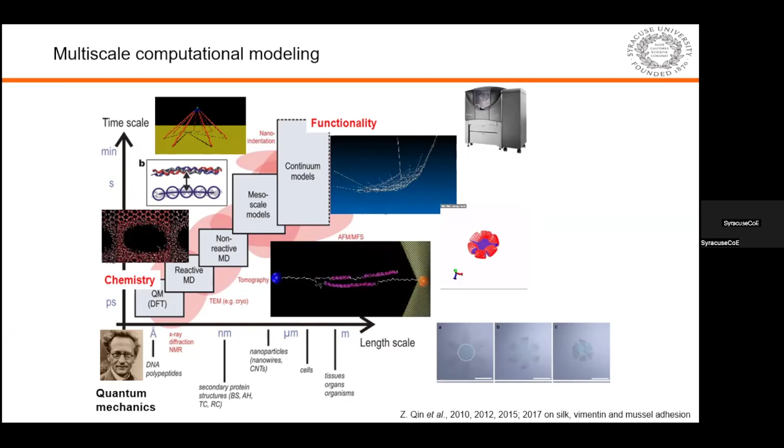For example, there are some simulation movies showing how these simulations can be applied at different scale levels to study the molecular mechanics, the large-scale behavior of spider webs, or design composites that are reactive to temperature. Here is the PNIPAM top coating; it's sensitive to temperature and can change shape once you change the temperature. These are just quick examples of our simulation methods.

The focus of our research is biomass, but biomass is a collection of many waste materials from different sources. It can be agricultural waste. It can be forestry, like cutting a tree or a wood board, so you have sawdust. These can be biomass. A huge amount of biomass is cellulose-based biomass that's composed of carbon.

If we want to use these to create useful materials with the best mechanical strength and the lightest weight, you can think of carbon fiber, carbon nanotubes, or graphene. Those are pure carbon atoms organized together to form strong network structures. You can also discuss how density changes Young's modulus and tensile strength, and design different architectures for different mechanical applications. That relates to my previous work on the scaling law of carbon-based architected materials.

Besides mechanical properties, we can also set up simulations to characterize thermal properties. We set one heat source and one heat sink, and study how those architected structures conduct heat from one end to the other. Once you create the 3D geometry from 2D graphene, you also introduce a lot of defects like 5-rings and 7-rings to the structure. Those defects scatter the phonons and make it difficult to conduct from one end to the other.

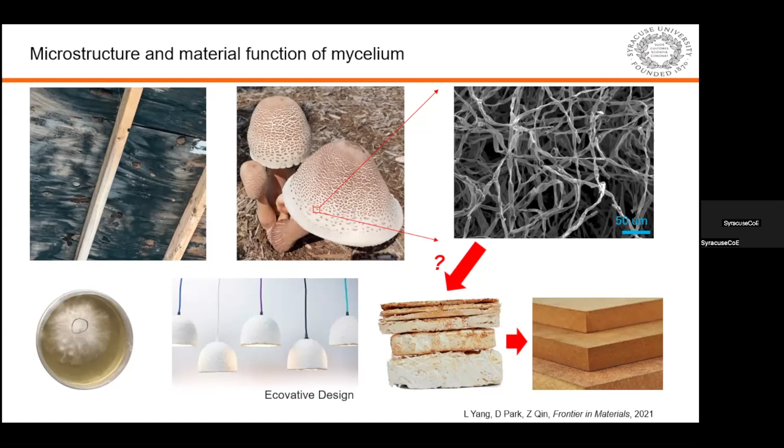And naturally, the mycelium is also very robust. Once you have black mold, which is related to mycelium, it will be very difficult to get rid of it. They can live for a long time. And they're also relatively easy to grow in the lab. We can prepare a petri dish and grow mycelium directly on top of the dish. So that's why we focus on this mycelium structure.

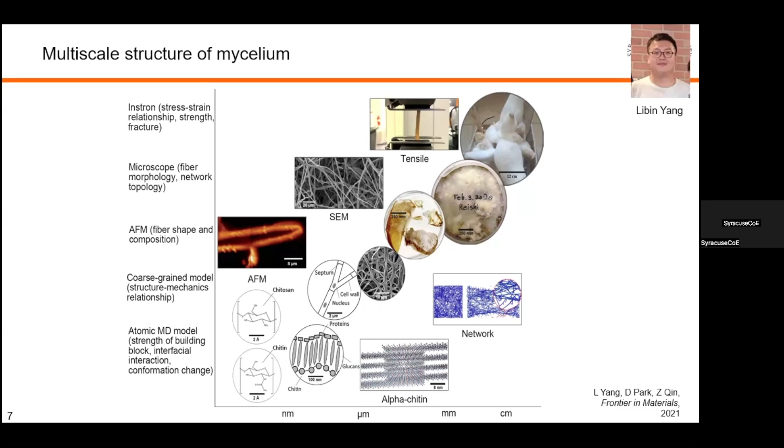One of my students, Libin Yang, my first PhD student, started to focus on this study. We first built a multi-scale picture of this mycelium. We ask, what's the material composition of the fiber? Once the fibers come together, what's the connectivity between them that defines the network? At larger scale, once you have a network, how fast can they grow? And once you take the mycelium from the petri dish and put it together with the biomass, how can they improve the property of these biocomposites?

It's also bio-safe. Once we increase the concentration of the agar, we effectively increase the stiffness of the substrate. And you see the growing speed also increases together with that stiffness. That's very interesting because we intentionally control the nutrient amount to be the same, but we just change the agar amount. So that suggests that the mycelium, while growing, can also sense the stiffness of the substrate. We have a paper in submission related to this topic.

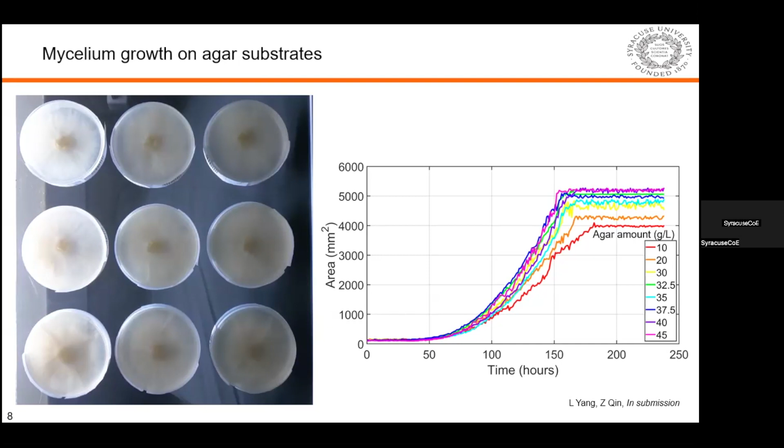After we grow the mycelium on the Petri dish, we put it together with wood fibers as the biomass. The wood fiber can be coconut fiber, stalk, or corn straw after harvesting. We use a blender to convert those wood fibers into small pieces and grow mycelium together. Here's the microscopic image. The thin fibers are mycelium, and the thick fibers are the wood fibers. The mycelium not only attaches to the surface of the wood fiber, but also forms entanglement with the wood fiber.

That's the way we believe the mycelium can bind wood fiber together, but also increase the stiffness and strength of the material. Libin sent this nice picture to MRS a few years ago, and he got this award. It's a very nice image of the mycelium structure.

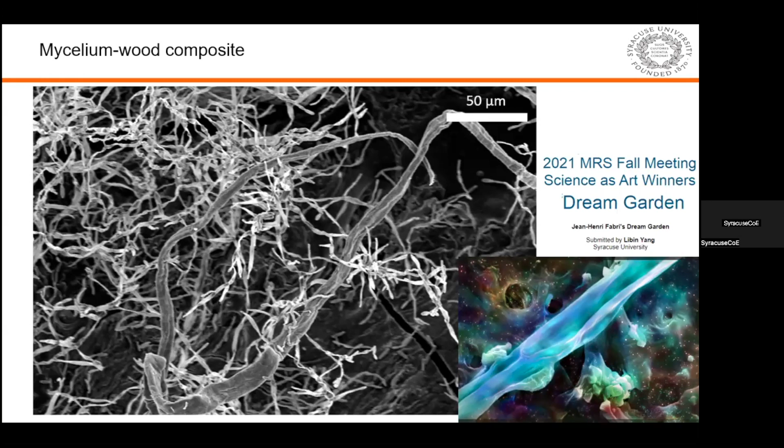But if you have a strong interface between those wood fibers, starting with exactly the same geometry, then during the loading test you see those interactions strongly contribute to the strength and energy dissipation. You have a lot of wood fibers you need to break before it ruptures.

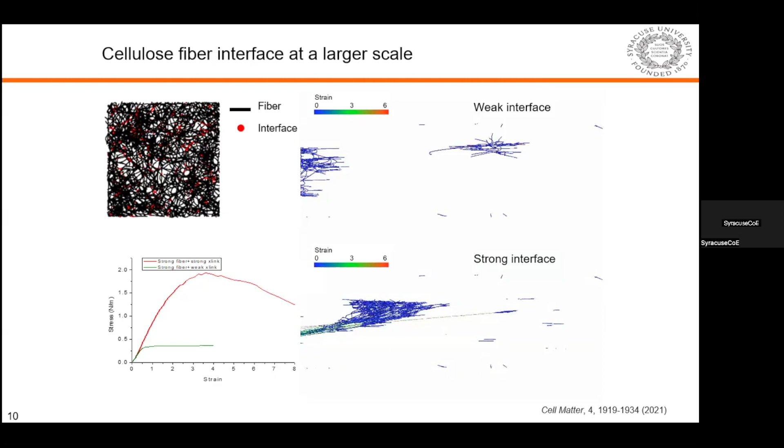So based on that, we move forward to the lab. We grow mycelium together with wood fibers, and then we culture the mycelium. After culturing, we turn that into dog bone samples, and we use a heat press to control the temperature and the pressure to press that into dog bone samples. And we do mechanical tests on each of those dog bone samples.

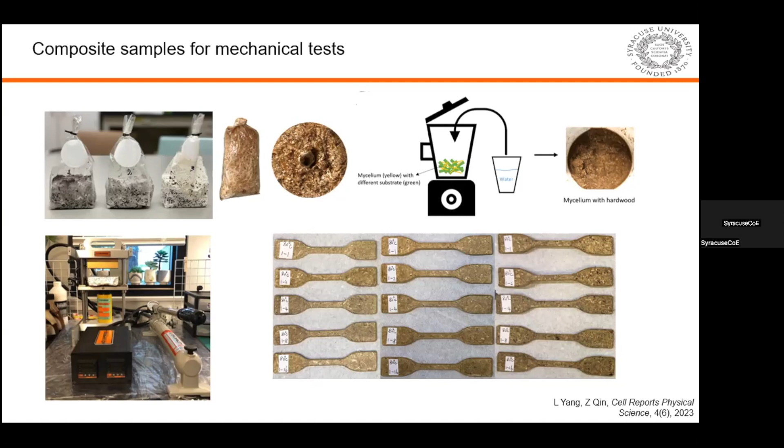And we analyze the results, and we build a machine learning model based on that to classify the strength, toughness, and the Young's modulus of these dog bone samples. And we correlate that mechanical performance to the treatment process. Like during the heat press, we have the temperature under control, the amount of time under control, baking time, and also the pressure under control, as well as the material, the substrate type.

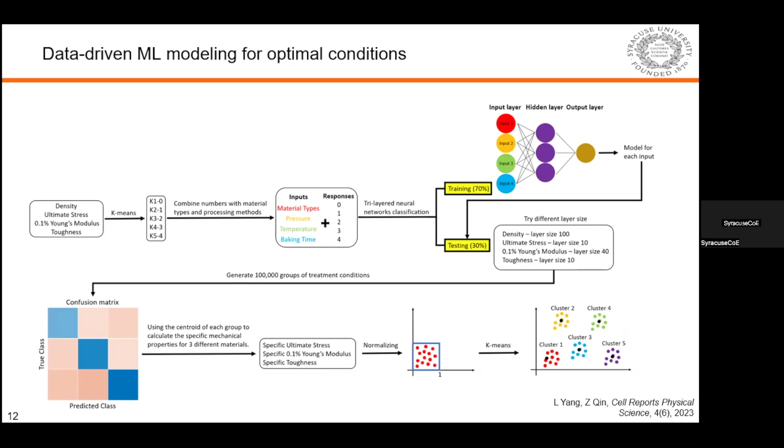So we correlate those processing conditions with the performance of mycelium, and then we build a machine learning model. So it's able to predict what can be the best combination of treatment parameters for strength, modulus, and toughness. That's the region highlighted in red. That's the cluster of results corresponding to the highest strength, modulus, and toughness. And then we can use the location of those regions to identify the optimal treatment condition for better mechanical performance.

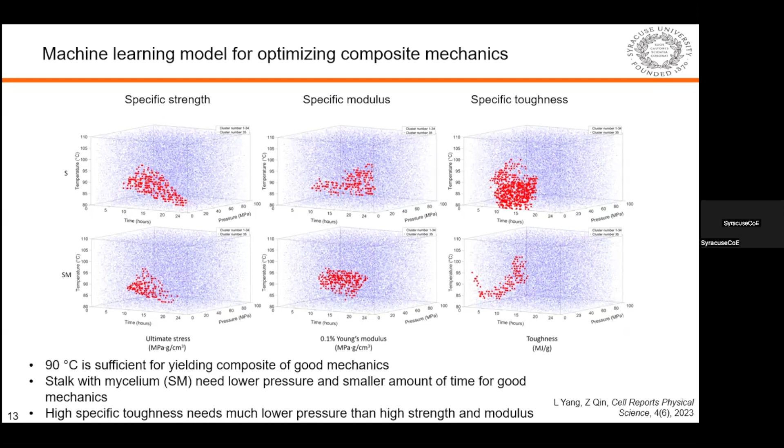And recently, we moved forward with this topic. Gargi in the lab is doing the mycelium, but she wants to study the property of the mycelium at the interface, including the thermal property. So we intentionally selected a metal surface because metal is very good in thermal conductivity. But mycelium, because of its low density and its porous feature, we expect it to have a low thermal conductivity. So we coat the metal with mycelium, and we put this substrate on top of boiling water, 100 degrees Celsius. Then we use the thermal camera so we can visualize the temperature distribution on the surface.

For the region coated by mycelium, because this mycelium is very thin, the thermal camera is actually recording the temperature still on the metal surface, not the mycelium. So you see the region coated with mycelium has a high temperature, but the region without mycelium is lower temperature. That means in the region exposed to air, the heat dissipates quickly and becomes a similar temperature to the air close to it. But in the region coated with mycelium, that heat cannot easily dissipate. That's why it's a higher temperature.

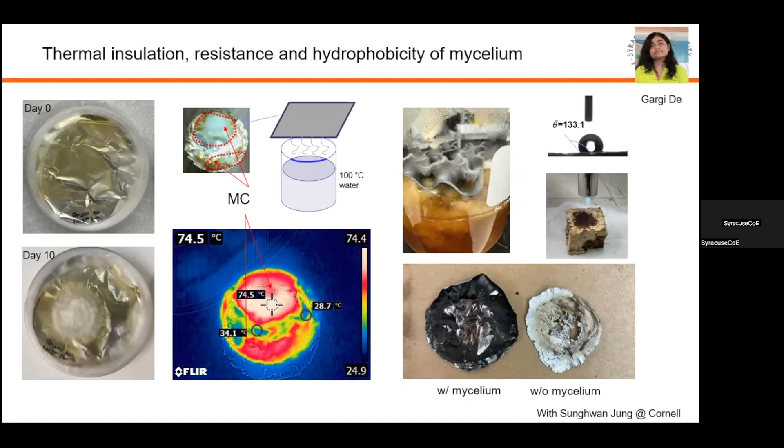And for the bulk mycelium composite, here we have an ongoing project with Professor Wilson, Bing, and Professor Zhang here at the Center of Excellence. We want to push the limit of this mycelium composite to apply to building envelopes, so we can benefit from the thermal insulation and the lightweight of mycelium. We are right now building a mechanical and material characterization lab downstairs, including a large green tent that can grow large mycelium blocks.

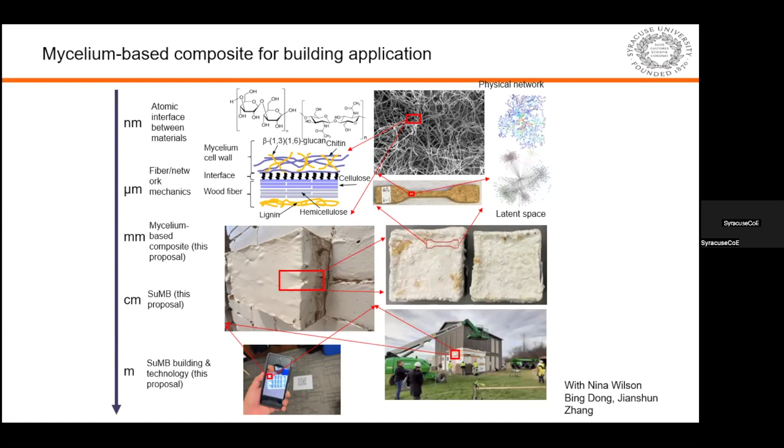Let's switch gears. Another application for biomass like wood: if you think about the Adirondack area, people there are sometimes off-grid, so they need to burn wood to get heat. But if you burn wood or cellulose indoors without good ventilation, it can turn into carbon monoxide. So my student Mingrui Jiang is asking how this carbon monoxide can get people into a toxic state, and once it's toxic, how to get rid of this carbon monoxide. Recently we got a paper published in JCTC, featured as a cover image.

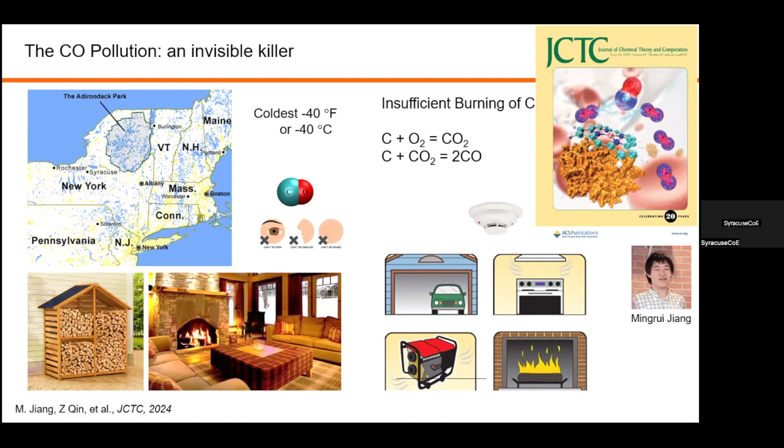So to answer that question, right now, once you get toxic by carbon monoxide, you need to go to a hospital, and the hospital needs to be equipped with a high pressure oxygen chamber, and then fill the chamber with pure oxygen, and then you can get rid of the toxic state. But if it's a low concentration of carbon monoxide, you just get a headache. If it's a higher concentration, you can lose your judgment. And if it's even higher, it leads to death in 3 minutes.

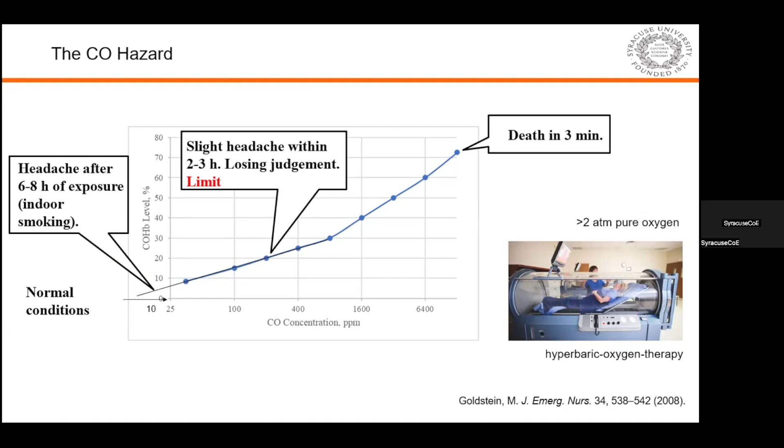So it's not only high concentration carbon monoxide that is dangerous; even cooking at home, if you do a lot of cooking, you can also get exposed to carbon monoxide at low concentration, like a toxic state. So that relates to the indoor environment and how this air will cause issues to humans. So we work to solve the problem.

We build an atomistic model of the hemoglobin, which is the key essential part in our red blood cells, and we study the binding of carbon monoxide and oxygen to this hemoglobin. Once we started to do that, we realized there's no good force field existing for this interaction.

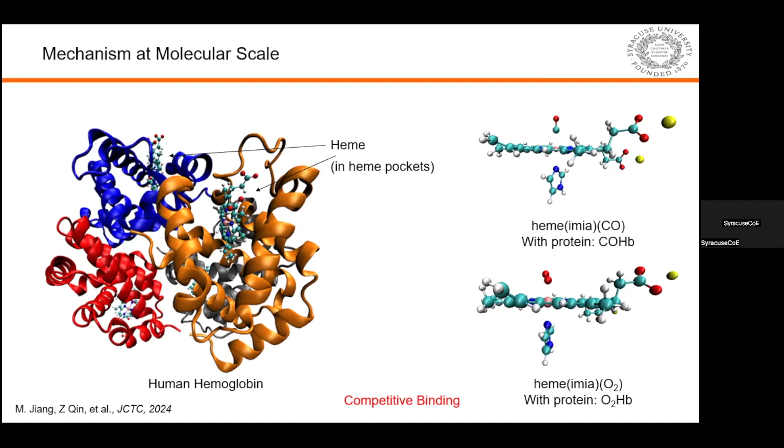In the hemoglobin, the key part to deliver oxygen is the iron. That's the key thing to form the metal coordinate bond with oxygen and then deliver the oxygen to different places. But once this position is replaced by carbon monoxide, oxygen will be difficult to bind. So that's why it causes the toxicity.

As I said, there's no good force field, so we build our own force field. We use DFT calculation, which is ab initio static calculation, and also CPMD, which is ab initio dynamics calculation. Using both results, we can characterize the bond length and the bond energy, and use that as the input to train a force field suitable for classical MD simulation.

The reason we want to do MD is because once we simulate the binding of carbon monoxide to hemoglobin, we also need to consider the water environment. But if we consider water, DFT will be very difficult for the calculation, too many atoms.

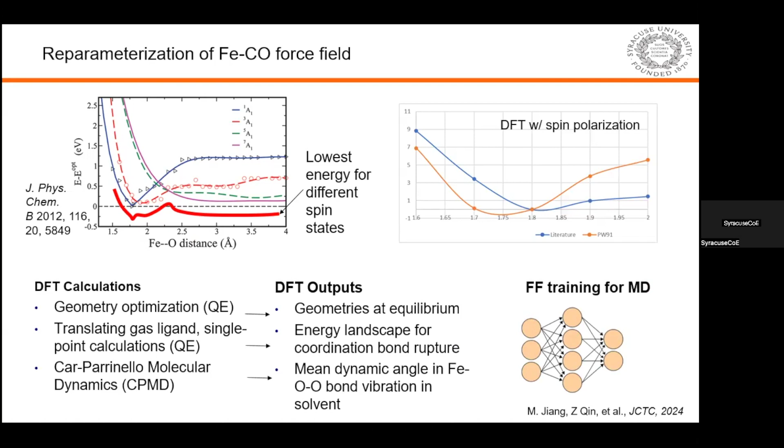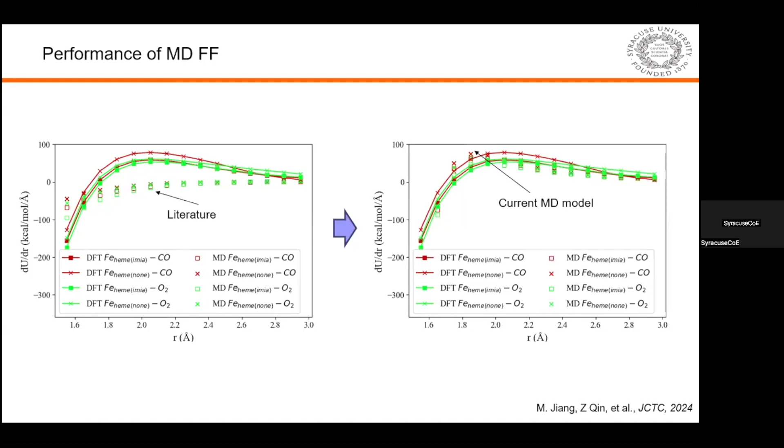So I just want to quickly show the performance of our force field. These curves are the ab initio calculation, and the existing force fields in the literature don't agree very well with the DFT calculation, but the force field we developed has a much better agreement.

Using that, we can simulate, for example, a carbon monoxide bound to the hemoglobin's Fe atom, the iron atom, and then use a spring to pull it off. During this simulation, we can measure the amount of force to pull this carbon monoxide from the binding state.

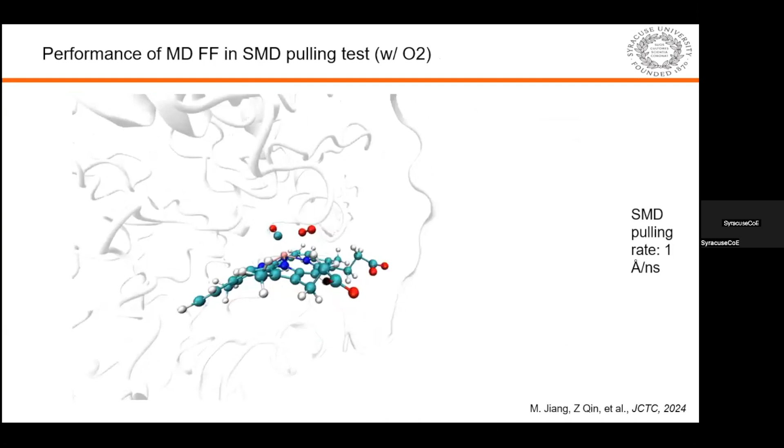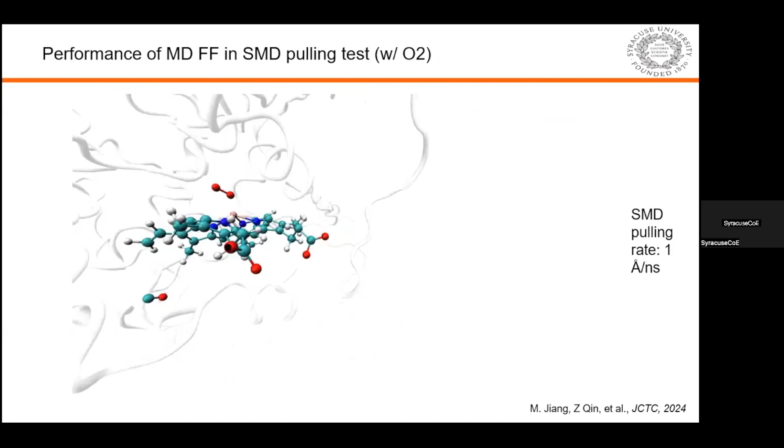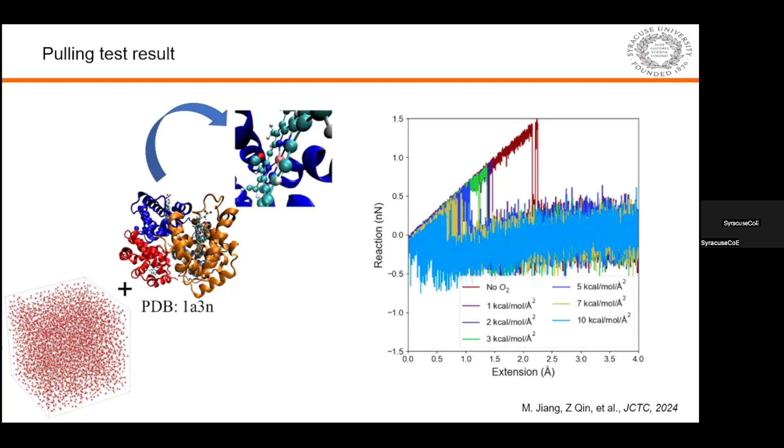In this simulation, we put an oxygen atom close to the binding site, repeat the simulation to pull carbon monoxide away, and measure how the oxygen biases the energy landscape for this attachment. We see that once we put it closer and closer to the binding site, the binding between hemoglobin and carbon monoxide becomes weaker and weaker. That's why the high pressure oxygen chamber can be effective to get rid of this toxic state.

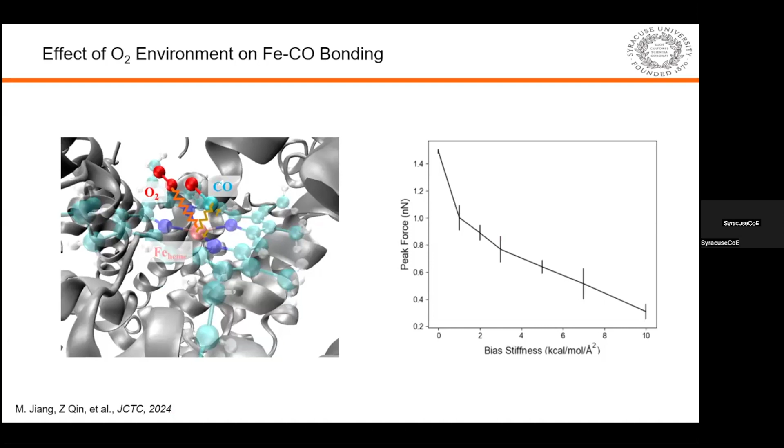We summarize the results, showing this bias stiffness that is proportional to the constraint between hemoglobin and the oxygen. Once that increases, you force the oxygen closer to the binding site, and the peak force to get rid of the carbon monoxide becomes smaller and smaller. So we are very happy about the preliminary results.

Based on that, we want to study whether there's any small molecule that can help facilitate kicking off this carbon monoxide. Is there any way we don't need to use an oxygen chamber, but other molecules? So we are referring to other medicines people use to treat hemoglobin.

For example, there is a disease called sickle cell disease. Once it happens, your red blood cells turn into the shape of a moon instead of a circular, rounded shape. The molecular reason is a point mutation in the hemoglobin. Once that happens, the hemoglobin assembles into a shape like microtubules. Once they cluster together, their surface area significantly decreases, so they lose the effect of delivering oxygen.

People have done a lot of study on this disease, and they found some molecules like 5-HMF, small organic compounds that can be effective to get rid of the sickle cell state. So we are testing those compounds to see if they're also useful to treat carbon monoxide toxicity. Based on our simulation model, we can study the mechanism of this disease, and maybe later use these small drugs and the force field we developed to treat carbon monoxide toxicity.

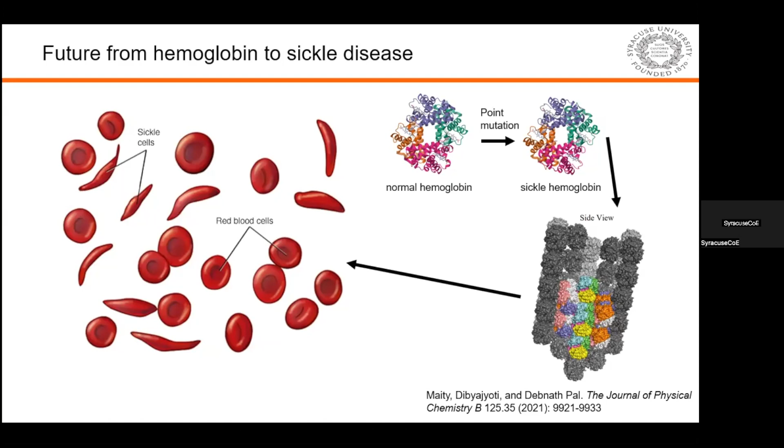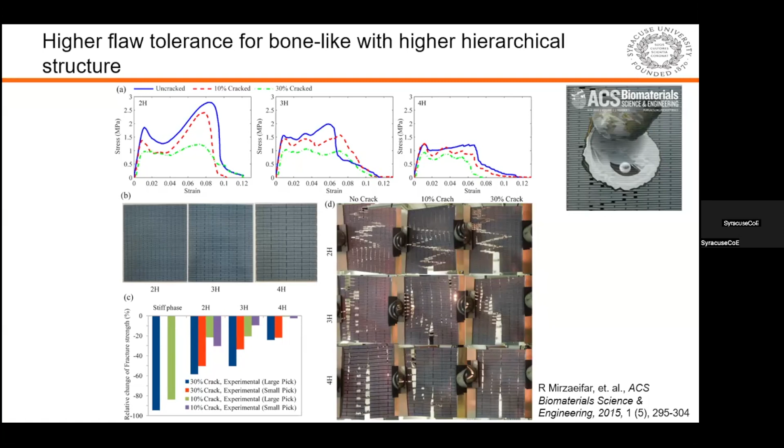So we've done 3D printing, combining rigid material and soft material to design an architecture that mimics the nanostructure of nacre. And we found both the geometry and this heterogeneous material combination are crucial to the toughness of those nacre-inspired structures. That's why, when we think about how to convert those biocomposites into stronger materials, we can refer to those lessons from nature.

Because the aim of the research is high toughness, it not only relates to composite material development but can also relate to large-scale engineering applications. For the composite, you can always have a structural defect or crack, or sometimes you need circular holes for functional applications. But if the material has those defects and cracks, based on our basic mechanics of materials class, there will be stress concentration. And the failure of the material always starts from the highest stress concentration point.

How do we improve the design of these composites and make them less sensitive to those defects and cracks? That's the question for composite design. But for engineering design, like tunneling, once you create a tunnel you cannot just drill a hole there. You need to figure out a way to reinforce the tunnel to prevent it from collapsing. People have done related studies showing you also need some heterogeneous material distribution to reinforce the top of the tunnel to make it less likely to collapse.

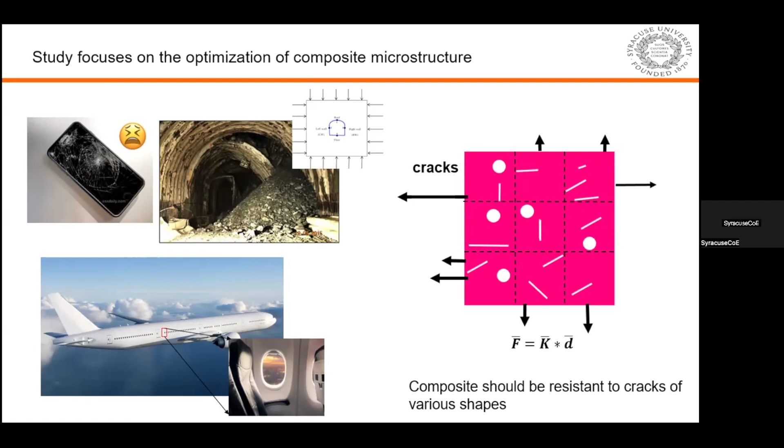Another application: if you have a tough material, you can apply it to phone designs to make them difficult to fracture or smash on impact. So we switched gears to study the crack and failure of materials. This is a quick example showing how nanomaterials fail. The reason I picked it is that for nanomaterials you have very clear visualization of how, atom by atom, the crack can propagate. If you check the front of the crack, those low-dimensional materials might give you the highest resolution, since you can see the behavior of every single atom around the crack tip.

So these three typical two-dimensional materials are widely used in semiconductors: graphene, MoS2, and MXene. Current semiconductors still rely heavily on silicon, but for future development of semiconductors, people have repeatedly proposed using low-dimensional materials. Graphene is a single layer of atoms. MoS2, molybdenum disulfide, is three layers of atoms. And MXene is five layers of atoms. They're all called two-dimensional materials because most of the atoms lie in the plane. Okay.

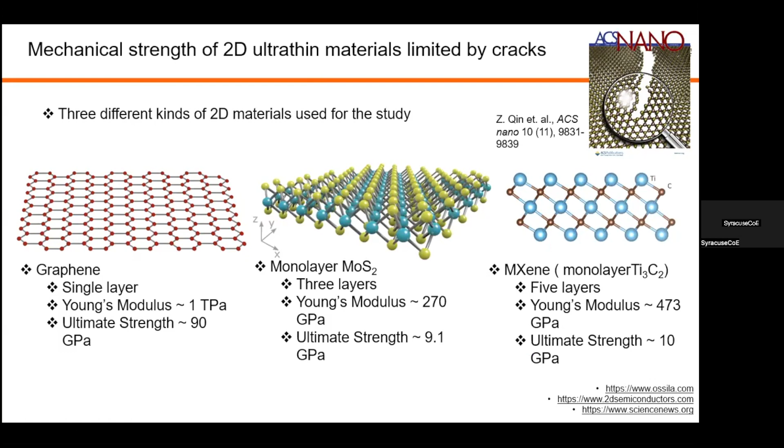This work was done by my student Camilando Paul. He took all those different two-dimensional materials and ran molecular dynamics simulations to study how they fracture. If you don't do anything and just take the pristine material, you see that under loading there will be a strong stress concentration at the crack tip, and once it starts to propagate, it will propagate through the entire material. MXene is more plastic and flexible, so it fails later than the other two materials, which are more brittle.

But a way to enhance the toughness of this material, to make it less affected by the pre-existing crack, is to borrow the concept from nature and create some nano-architectures. So we simply created bridge structures, turning a continuous 2D material into isolated bridge structures. We think if it's continuous there will be high stress concentration, but if it becomes a bridge structure, the stress gets more distributed.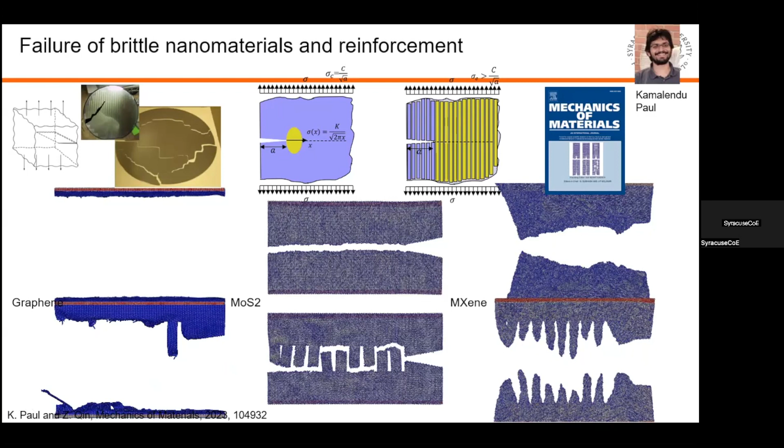So the architecture is important. I also want to say that how to make the flexible material phase, like flexible means low Young's modulus, but also high strength. So that's also a key to improve the strength of the composite.

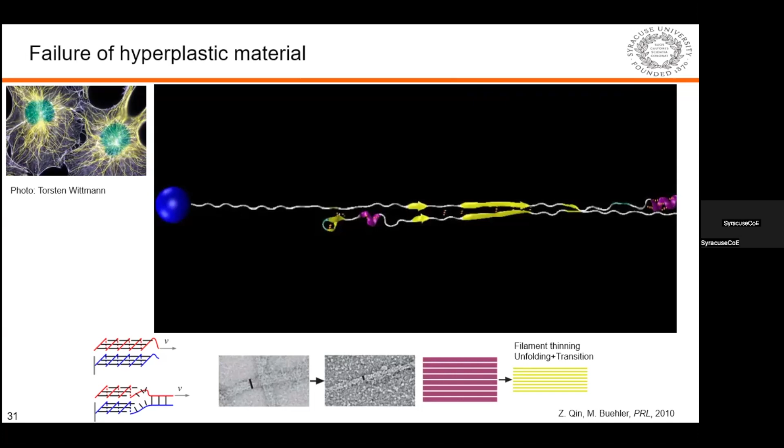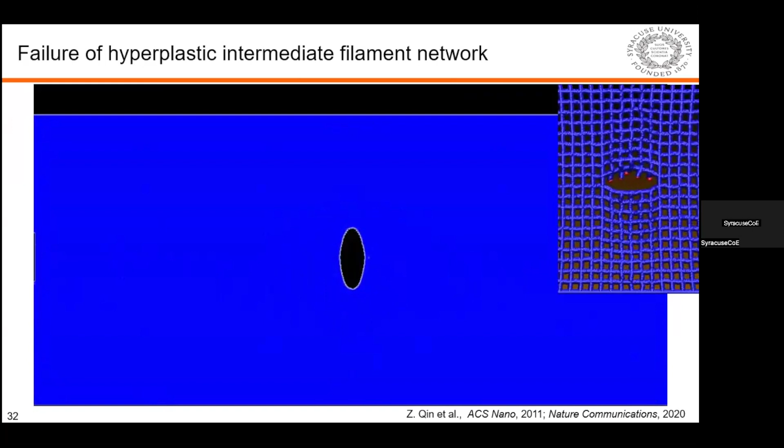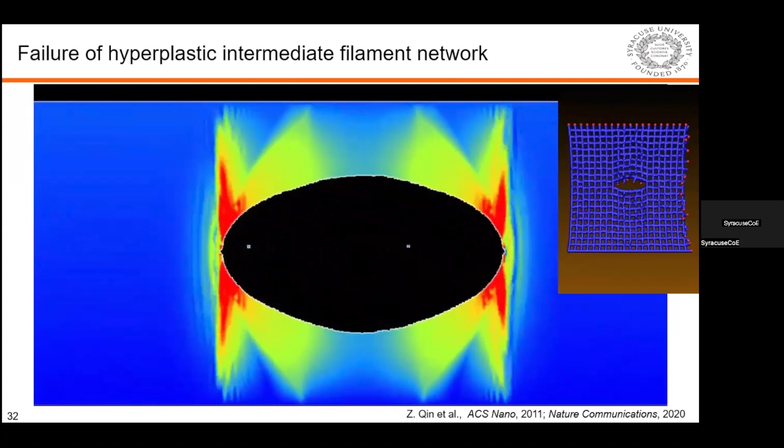So based on these atomistic simulations, we built a coarse-grained model to visualize that once you have a small network and you apply loading to these intermediate filaments, because of the hyperelasticity and stiffening behavior of the fiber, they will not crack immediately, but the shape of the crack changes significantly from a single line to an ellipse. So that reduces the concentration of the stress, and that makes this network much more difficult to fail.

So here, the colored nodes mean the different stress states of the filament. At the beginning it's blue, but with larger and larger deformation it turns red, which means it's about to break. You see, for this small network, it turns into a totally vertical ellipse. That means the stress concentration at the two ends gets much smaller than at the beginning.

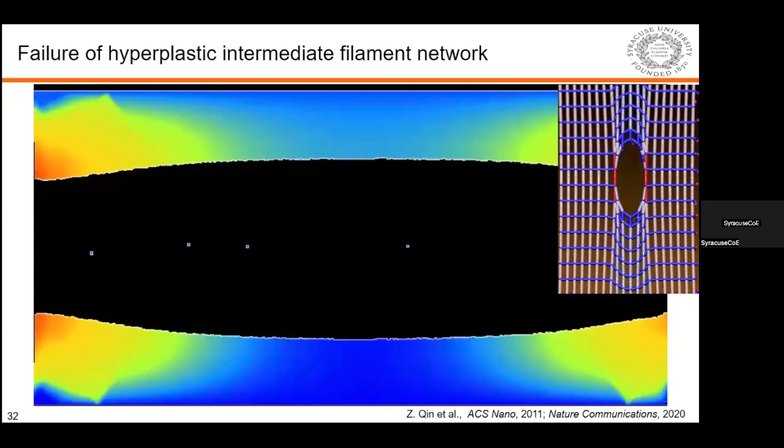Okay, so on those two bases, we want to study the architecture, and we also want to find the material, like the binding material between those blocks, that's much more flexible and will fail at much larger strength, ideally hyperelastic. And then we can mimic nacre and combine the stiff, rigid phase and the flexible phase.

We aim to obtain a material with an intermediate elastic modulus but much higher toughness. Because the modulus still depends on the modulus of each component, each building block of the composite. But toughness can get much larger than that of the individual materials.

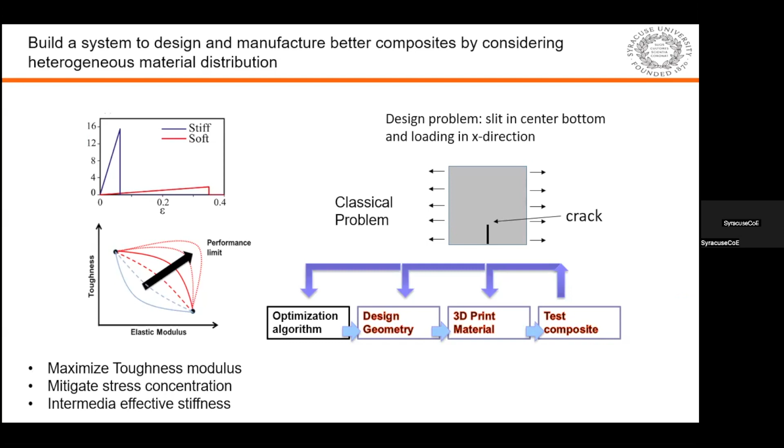The general study is to take the design, like the sample's overall shape and the boundary conditions, and discuss how the material gets distributed. Then we can optimize the distribution of the material, generate the geometry, do the 3D printing, and do the validation. So I'll quickly show some previous results. This is a collaboration with Grace Gu from Berkeley a few years ago.

At that point, there weren't many machine learning algorithms. We just used a greedy algorithm. We discretized each pixel here, this is 8 by 8 and 10 by 10. And each pixel we can denote as either 1 or 0: 1 for rigid material, 0 for soft material.

And then the elastic matrix of the entire sample can be given as a function of the stiffness of each pixel. Then we can determine the loading force by using a finite element method to solve the constitutive law, and further get the stress and strain distribution. The reason to start with a small 8 by 8 lattice is computational capability, because the more lattice sites you have, the more possibilities you get.

So if you have 10 by 10, you have 2 to the power of 50, a huge number of possible conformations. But by using the greedy algorithm, we can still obtain a locally optimal geometry that can dissipate the stress. Later, once there were machine learning methods, this lattice number could increase to around 100.

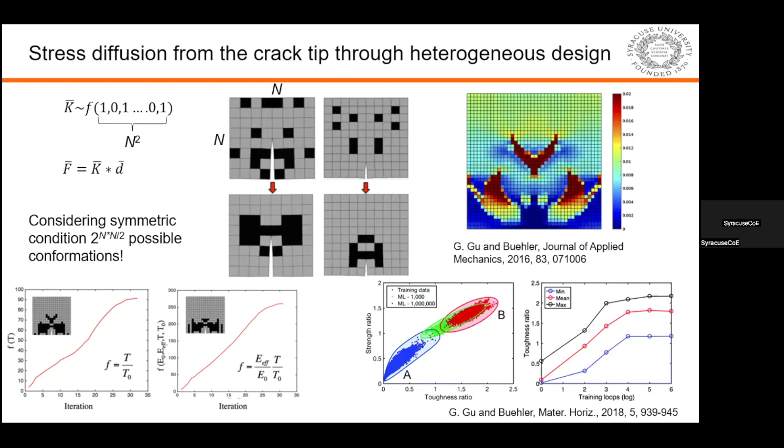So to further reach some optimal designs for those composites. And at Northwestern, Professor Wei Chen studied these problems with the background of large-scale constructions, like the tunneling problem.

So they study, if you have different tunnels, how to design the distribution of material stiffness to prevent the tunnel or those architectures from collapsing. So basically, they don't consider a heterogeneous material distribution, but consider different architectures that can lead to different stiffness, and that effectively also considers their distribution to get a high strength of this entire sample.

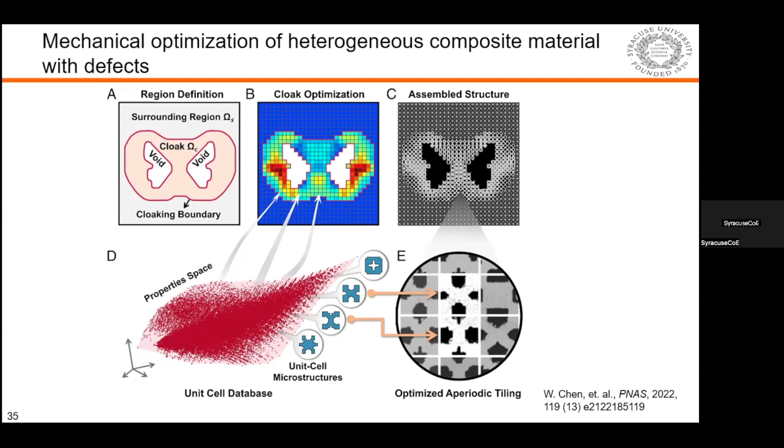So I will use two examples to show you how we think about those problems. So first is about bamboo. The background of this study traces to many years ago. We started to consider a bamboo material. Bamboo is a lightweight material for construction, and it has very highly hierarchical structures.

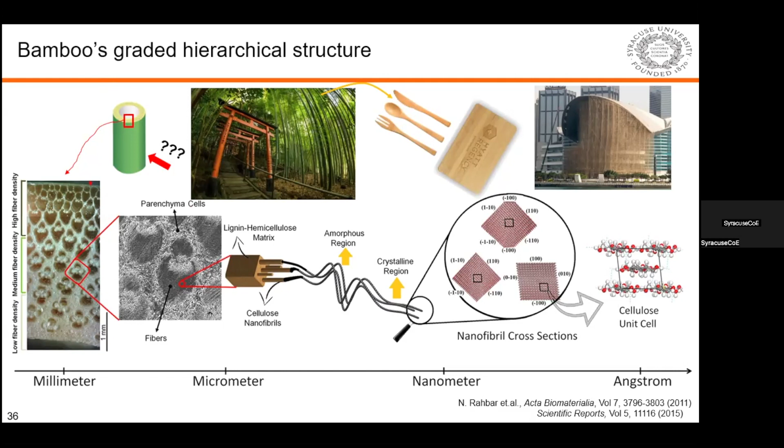So think about the thickness, along the thickness. You have more pores for the inner surface and less pores for the outer surface. And then if you check the outermost surface of bamboo, interestingly, it's not just cellulose, but there are a lot of silica particles. These silica particles get embedded into the surface of bamboo and make the bamboo surface strong. So when you use your knife to hit bamboo, unless you use a very large force, it won't easily create a crack.

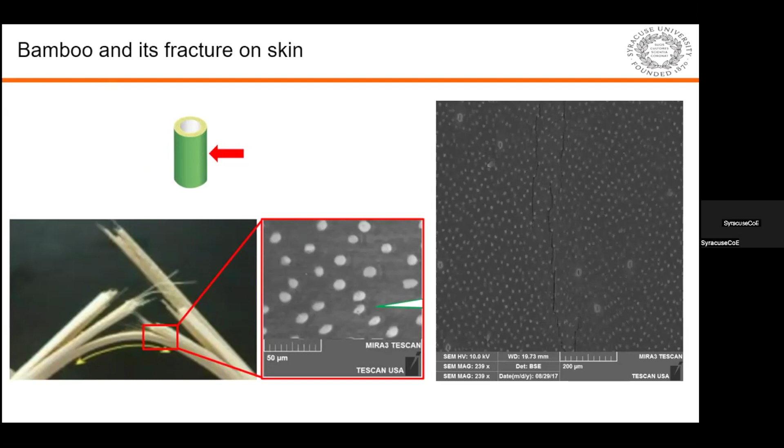And then here in the microscope, we see once there's a mechanical fracture, this crack will not penetrate through those silica particles, but will tend to wind around the silica particle. So that suggests this is good for higher energy release, because that creates a much longer pathway once the material needs to fail.

And here is a backscattering image showing those silica particles are really rich in silicon instead of carbon. So we have atomistic simulations to study how cellulose interacts with the silica of bamboo. And we show that once you try to deform the cellulose, instead of failing at the interface, the cellulose will fail inside itself. That means the interface between the cellulose and the silica is very strong.

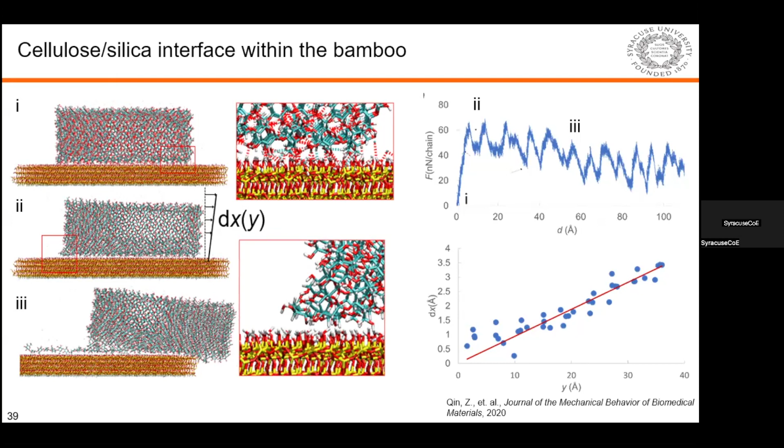But still, it doesn't explain why this conformation of the silica distribution contributes to the toughness of bamboo. So take a look at this SEM picture. You may say this silica distribution is random, but if you take another look, it seems not random. Because if you just randomly generate the pattern of distribution, it won't be very similar to those.

We tried different ways. We tried to select tiles and use that as a representative unit, but it was still very different from the overall distribution of bamboo. So then we thought maybe it's difficult for our human eye to read this pattern. Can that be read by machines?

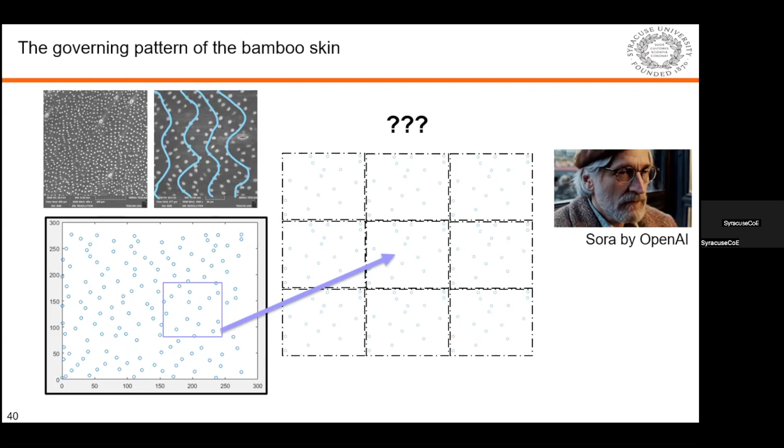So you may have heard about generative AI, like recently Sora by OpenAI, which can generate images similar to human beings. So maybe the machine can identify this high order inside bamboo better than us. We just gave it a try. We did not use the OpenAI method. We used a much older algorithm here, called DCGAN, Deep Convolutional Generative Adversarial Network. But that captured the essential idea of generative AI.

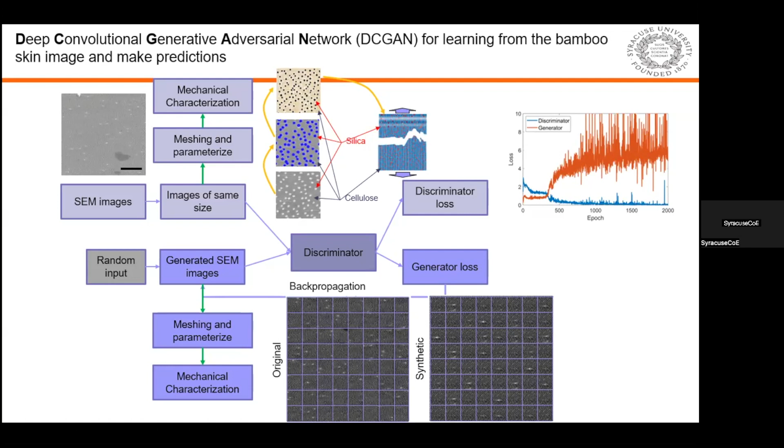So you have two agents, one responsible for generating some conformation. The other agent is responsible for distinguishing the generated image from the input image. And both agents evolve and become more and more expert at their work. And at the end of the day, you can generate synthetic images very similar to the original one. So it's also a very good method to generate massive data to do more tests.

So here I just give a bigger picture. If I take a single piece of the material and put it together with another synthetic image and don't tell which one is which, if you don't have a lot of training, maybe it's hard to tell the difference.

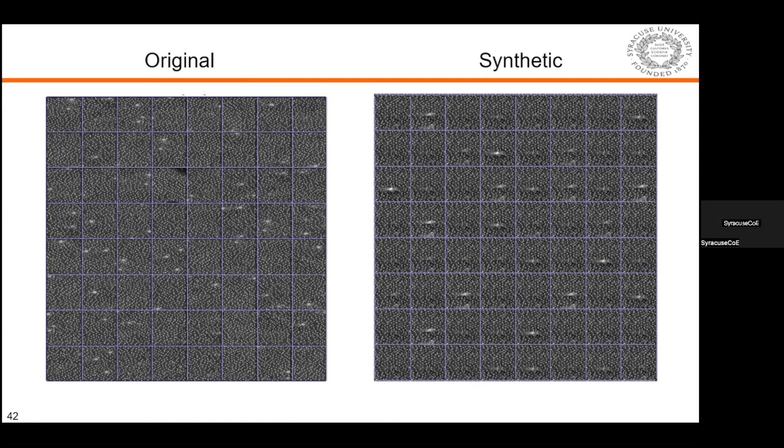And then we use those generated conformations as the input to do a mechanical test. We assign the particles the mechanics of silica, and the matrix that of cellulose, and then we do a lot of tensile tests on both the original SEM picture and those generated images. And we show that they have very similar strength, toughness and stiffness. So it means those generative AI images are not only visually similar, but they might also capture some orderness in the particle distribution.

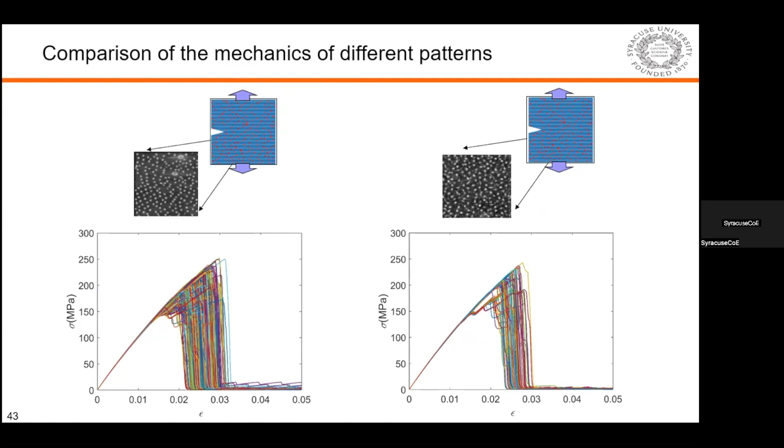And then the application of this work, so we can apply this method to like 3D printing by using the liquid metal with the thermoplastic elastomer. So we have a collaborative work published with Wei Nan at Argonne, and then we can use the simulation to predict behavior and use this generative AI to generate more data to test in the simulation.

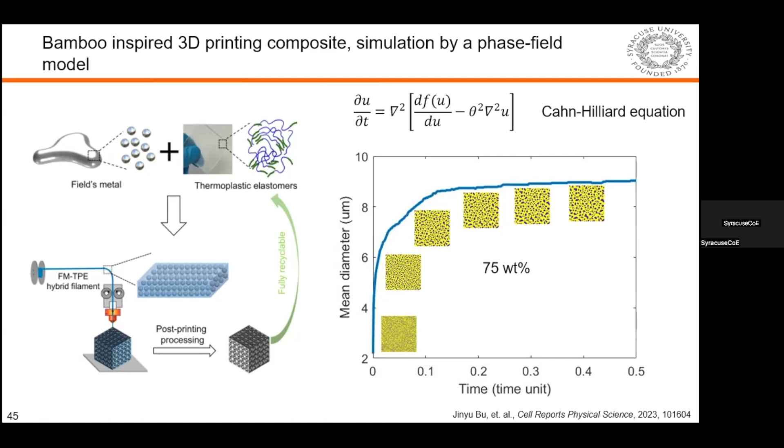But another thing, like for bamboo, the silica particle, that's similar to deciding the location of the soft material. So that's an old question because consider the possibilities. Changing the position of the particle or changing a few soft pixels, that has a few degrees of freedom. But if you consider the entire region, and the rigid material and soft material are almost similar amount, then the probability will be much more. And that might not be able to be effectively solved by the previous method.

So that's why one of the students in my group, Milad, he's here. We study arbitrary composites with almost equal concentration of the rigid and soft material, and then solve that with generative AI. He used stable diffusion, which is much more powerful and generates good visualized images compared to the DCGAN. This study started with images that we obtained from molecular dynamics simulation for the stress distribution of this composite.

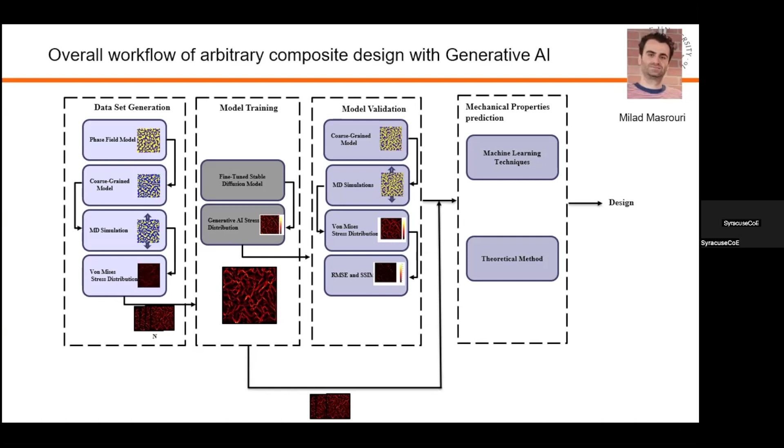And then the generative AI just learned the stress distribution and directly predicts the material composition together with the stress distribution. So once we have these models, we don't need to get some design, then do the simulation to predict the stress field, and then select which design can be better. Generative AI generates all the possible conformations and the stress distribution at once. So here are just some examples. These images are fully synthetic from generative AI.

Then we can take the conformation of the material distribution, run the MD simulation to get the actual stress distribution, and then compare the difference. Pixel by pixel, there's still some difference, but that difference is very small. And the biggest advantage of this method is, you might have heard machine learning is data hungry, but with this generative AI, it's no longer data hungry. You can just give 100 images, and that will give you a great prediction and a great model. So you can use that to generate many conformations with the stress distribution at the same time.

So how to use those stress fields? We need to correlate that stress field to material property. We can take the stress field and do the average to calculate the applied stress, and then we can generate many paths, and based on the paths, we take the integral and calculate the amount of displacement. Once we have the stress and the displacement of the sample, we can calculate the Young's modulus, and we can interpret the ultimate strength and toughness of the material.

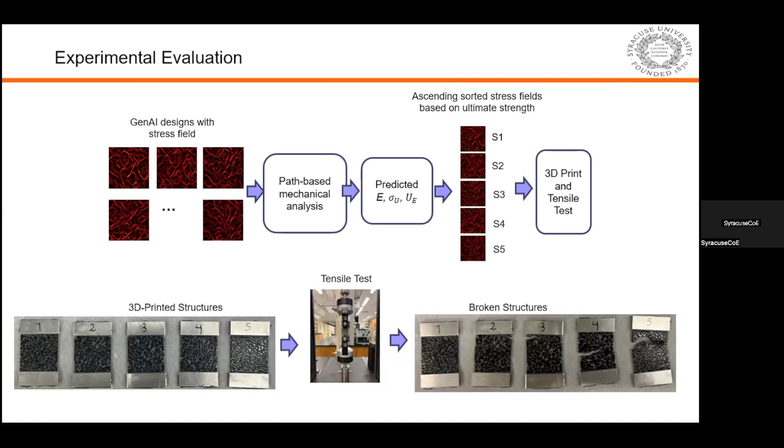And here's the summary of the workflow. Generative AI generates the design of stress field together with the material distribution. We use the path-based mechanics analysis to predict Young's modulus, strength and toughness. Then we can sort those conformations by certain order, for example, here we sort by the ultimate strength. And then we can turn that into 3D printed structures. We use our tensile machine to do the test. These are broken structures.

And here's just a movie showing the test process. We use aluminum tabs to glue the specimen, and then use this instrument to apply loading. We get the stress-strain curve, and we compare the ultimate strengths of the 5 samples. This rank perfectly agrees with the prediction from the generative AI together with our mechanics analysis. So we are happy about that. We're going to repeat this test on more structures to verify this method is useful and efficient to generate arbitrary designs of composites.